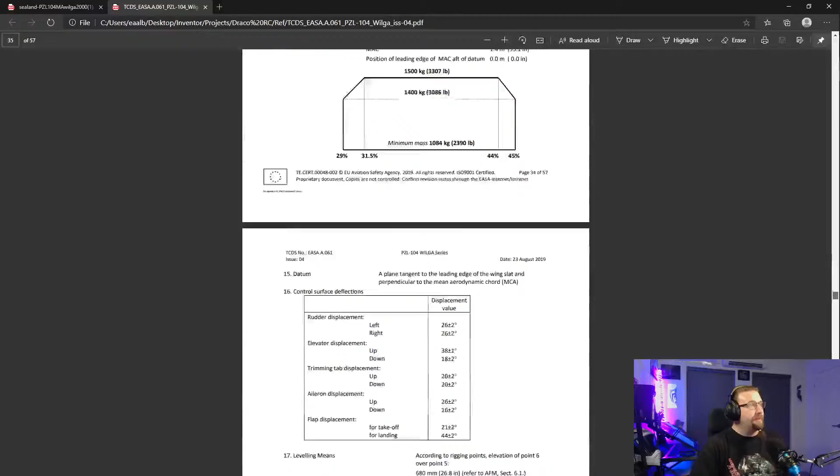Stuff like this - yeah, so I've got lots of awesome stuff. Got the EASA documentation, European Union Aviation Safety Agency. This goes through all the Wilgas, from the 104 Wilga 80, Wilga 32s, the 2000s, all the Wilgas, all the information. This is a big document. Lots of stuff. Most of it's going to be useless to me, but there's going to be interesting stuff in it.

For instance, let me just move to a random spot and pick something. Load factors, not so important, but we do have this information. So this is important information here - wingspan, 11.28 meters. So we can say 11 meters to be safe if we just chop off the tips, because I'm trying to measure from the center of the plane to the end of the chord.

This is important for when I'm doing the designs for it. I don't need the tips. I can design those after and then make sure that they're inside of a certain size.

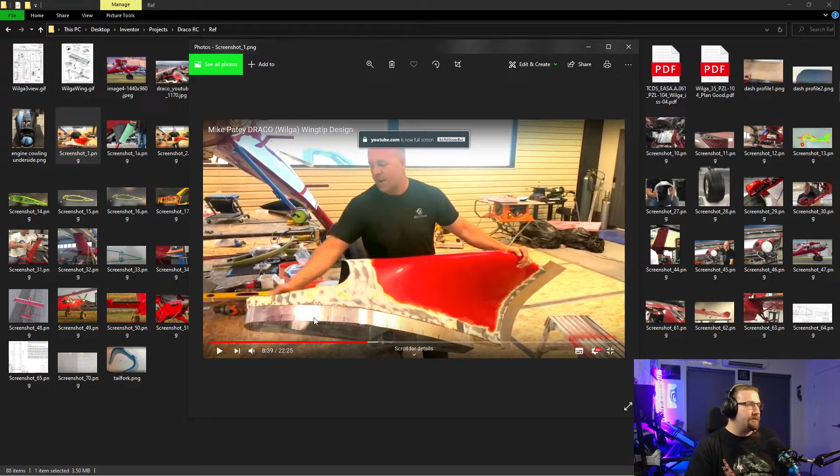But it doesn't matter anyways, because of course he decides no, I don't want wingtips that are that small. So he made his own really awesome ones. Where's the picture of it? So he made these - these are standard, but then he cut stuff out, added these spacers on it because he increased the front of the wing, and he's also increased the trailing edge.

So he's had to modify this, and then goes and builds an entire new light assembly on it, which was really cool. That's going to be fun to model. Modeling this shape is going to be loads of fun.

There you go, Ruby, nice of you to join me. How have you been? You doing all right since you got back out from the hospital? I saw that on your Twitter. What have you been up to?

What else we got? We got some really nice shots for when he made - he makes this wing tip, right, this modified wing tip, and then he's like, you know what, I don't have enough fuel in the plane because I want to make this trip. I want to go a little bit further, so I need more fuel. So he goes ahead and makes a new one that's the same thing, but it's a little bit longer, and there's a fuel tank, an extra fuel tank inside here, and it's just like, dude, that's awesome.

Am I going to make the engines? Do you mean the engine singular? There's one of them. Here's a picture of the plane. So I'm going to use an electric motor.

The plan so far - this may change, this is early days, we're still working out the design constraints. I've got this Turnigy motor, this is the Typhoon 500, this is a motor out of a model helicopter. So you put this on a gearing ratio. Now I want to make an adjustable pitch propeller.

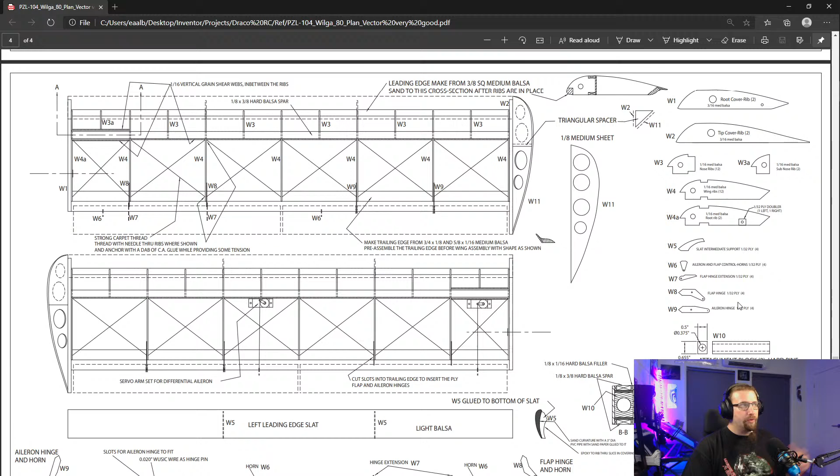This is the flap. What do they call that? Not strut, knuckle, hinge point. What do they call them? I forgot what they're called. Give me the name, please. Brain, come on, hello. There's a thing of them in here somewhere. Here, oh, they just call them hinge. Hinge extensions, control horns. That's it, control horns. So control horns are the ones you attach to the flap or the aileron, and the hinge is the one the aileron is attached to, and the control horn is what you put your lever angle on, your lever, so.

This was a really good set of designs, really good set of plans, and I can zoom right in on this to get nice, faithful... This is a vector drawing, so I can get really faithful images that I can take screenshots of.

Yeah, it's Hinge. I thought they had a proper name. There's a proper name for them. I forget.

So yeah, I will mostly be using this. It has wire landing gear. I don't know why the main gear is made out of a bent piece of music wire, yeah.

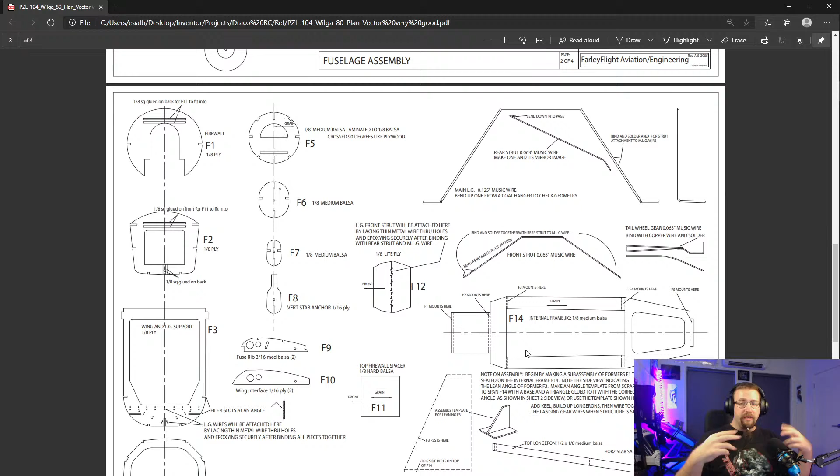0.063 wire, not useful. So the landing gear is going to be the biggest design challenge, because I'm going to have to reinforce them with carbon fiber rods. I'm going to have to design cavities inside the thing for the resin printing to slide those rods in there.

But then the actual suspension mechanism is going to be quite difficult, because he made quite a robust system, but when you get down to this small scale, it's going to be trickier and trickier to put the axles through. I'm going to have to get either carbon fiber axles or metal axles, or brass bushings or something to actually stiffen up some of those designs.

Where is it here? So this is the knuckle assembly for the suspension hinge, and he's got a big strut that he sticks in the back that comes off this piece that he stuck off the side here.

So I would have a carbon fiber rod, let's zoom in on this. I'd have a carbon fiber rod that would run through this up to the fuselage, and then I could probably get away with drilling a hole from the other side here and putting another rod through this way, or vice versa, drilling a hole and having that drill go through the first rod I put in, and then I can epoxy that all together.

And then this here, I don't know, like the connection between this big rod that goes to the fuselage and then this axle that has to go in here. Maybe this rod is going to go through a rod that I first put through here. So I put one rod in here first, let's make it bigger. Then we drill the hole through that one and a hole through here to line up with the hole that's already in there for that one. And then I put one from here in here and drill through it here, and then put one through here, so that'll create a nice stiff frame there. And then do the final drill for this one for the axle.

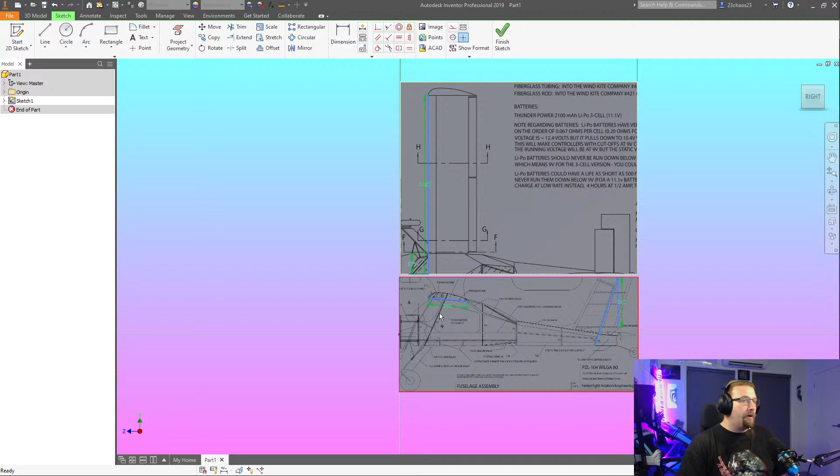So I've got this open. Now, I started with, based on how big my resin printer is going to be, that determines how big of an object I can print at one go. So if I want to make the wings in a reasonable amount of time with a reasonable size to get the structure for the carbon fiber spar, all the hinges for the flaps and ailerons, the leading slat on the front, then it needs to be a certain thickness, and that's going to determine the length of the chord.

So I'm going to go with 250 mil for the length of the chord. So from the front edge of the wing to the trailing edge of the wing with a flap, about 250 mil, maybe a bit more, because this is missing the actual flap here. So 250 plus. So where's my tape measure? If I get that out and measure out 250 mil, that's going to be a nice fat wing. Right, from here to here. That's a nice fat wing. So there's a lot that I can fit in that space.

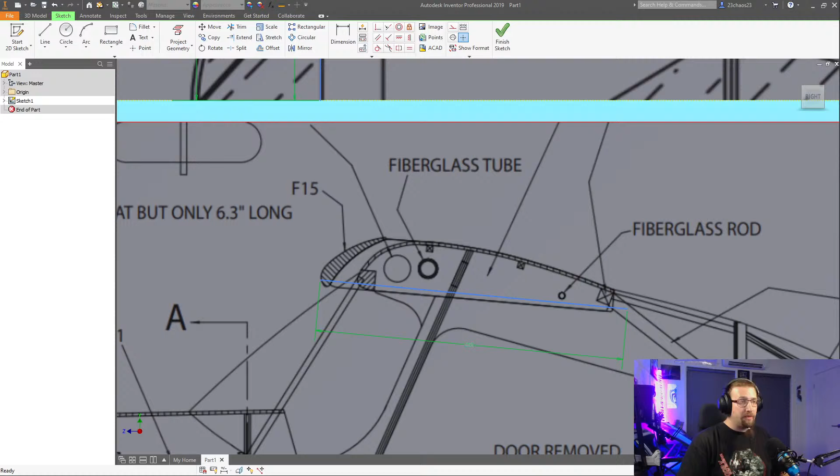Now that I've got that measurement, I then get the drawings, put them in Inventor on the image planes, and scale them to that measurement. And then I can start pulling off other measurements. So then I go pull off the wingspan from the center of the plane, and it's around 1,100 millimeters. So that's a 1.1 meter wingspan either side, which is decent. This is going to be a 2.2 meter plane.

Let's just show you how big 2.2 meters is. Right, this is a decent sized room. See that back corner over there? That's about 3 meters away. There's 1 meter, there's 2 meters, 2.2 meters. I'm touching the door handles on the other side of the room over there. So that's a decent size. That's a decent size wing. As she says, it's pretty big.

So that's gonna be lots of fun. And I can print that. So I can print the wings standing up inside the resin printer that way. We hope. That's gonna be fun.

So what else do we need to work out? Now I need to work out the small components, as I was saying, the landing gear and that. And I've got a book that I've been writing when I spent the whole day yesterday watching his videos for the build series for the Draco, and writing down every little bit of information I could. So I've got a whole page of writing all sorts of fun details, and the big tires that he stuck on this thing.

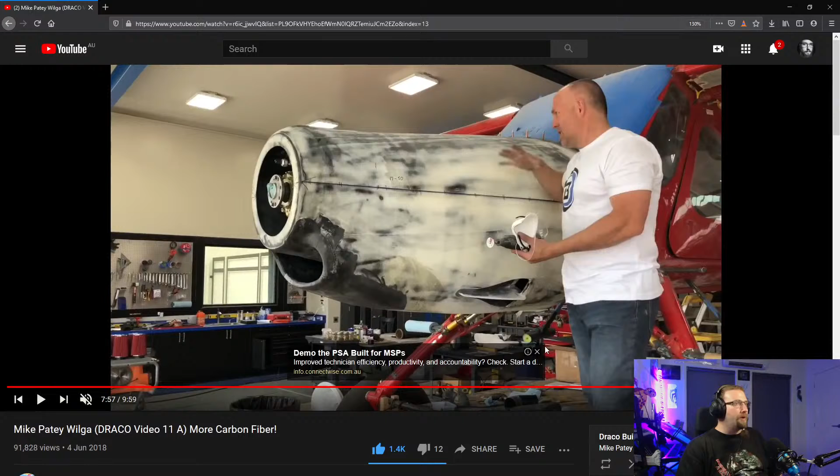And looking at photos and comparing the size of the tires, I mean, I've got images like... where is it? I'm sure I'm missing some photos here. I must have overwritten a bunch because I'm sure I've taken screenshots of this. So I don't know, I'm going to take a screenshot of it now. Save. 68, I don't know, save.

So I can compare now because I've got a rough estimate and I know what size those tires are, so I can work out the size of that engine.

Shots like this one, the camera is very far away, so it's a very long shot, which means there's very little perspective shift on the image. Everything in the foreground is very similar in size comparison to the background. There's very little perspective shrinkage, and I can come in and go, right, from here to here.

Screw it, where's my tape measure? If I know that the tires are 35 inches and I measure it on the screen at 105 millimeters, and then I measure up here to that, it's at about 165.

That's not right, there's a bit of an angular perspective shift. So let me measure from the middle of the tire up to the top of the tire, which is a vertical angle. There should be very little perspective shift on that. And we get 50, so double that, it's 100.

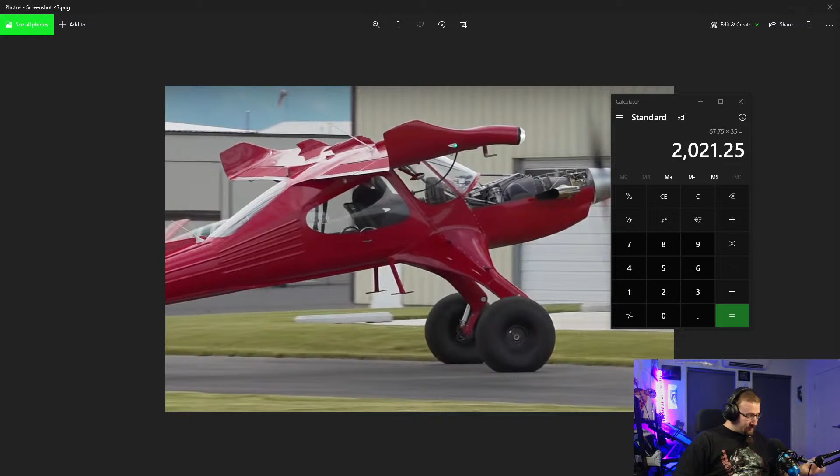And this has got a bit of a lean to it, like the plane is pointing away, so that measurement will be a little bit shorter because of the angle the camera is looking at it from. Woo, go me. So yes, I will run with the 81 inches, it's pretty damn close.

And we will carry on with that. So coming back to here, let us put in this doodad, which is going to be our firewall.

Now see, this is why I don't like these balsa plans, because they draw it funny compared to the real aircraft. If I go and get another image, let's grab that orthographic 3D scan that they created of the plane.

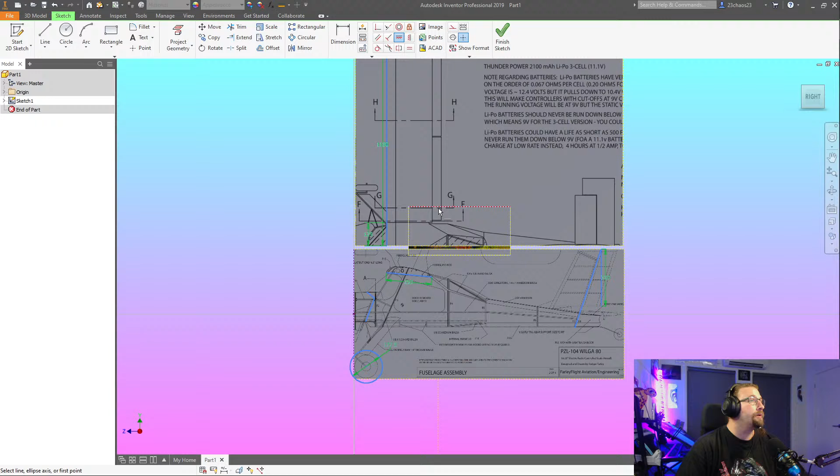Let's chuck a... nope, other one. I don't know why it flips around in some of the views, you put the vertical constraint for a horizontal constraint. Let's move you out of the way.

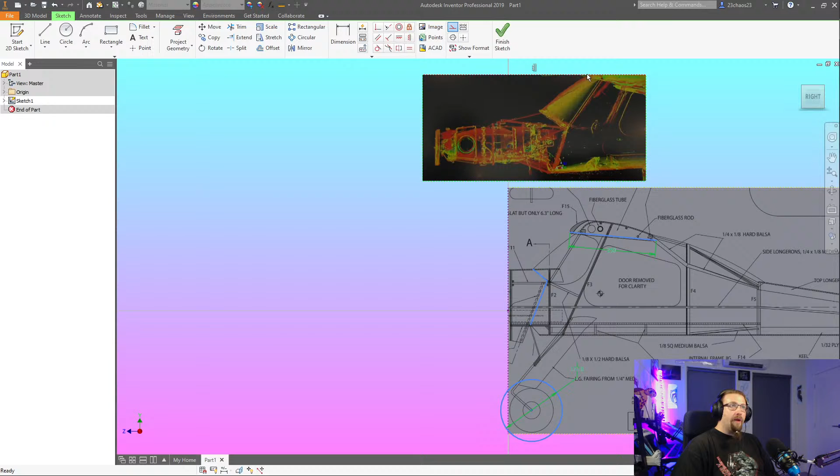So where is a line on here that we can absolutely guarantee we can use as a reference piece? I think it might be the tip of, windshield to the start of the door frame. So the door frame in this image is along this line here, because in here they've removed the door. This is why I don't want to use the balsa plans directly. You look at the radius of this door here versus the radius on this balsa plan, completely wrong. That's why I'm only using them for very basic measurements. But at the end of the day, I'm going to use these pictures I grabbed off YouTube from his videos, because they'll give me far better dimensions on certain angles and radiuses. Even the angle on that windshield is different.

No, it's about the same. It's pretty damn close.

So what other measurement can we use? From the gear here through to that point there under the wing. Let us draw that on here, point to there. Right, we will use that as sort of a reference point.

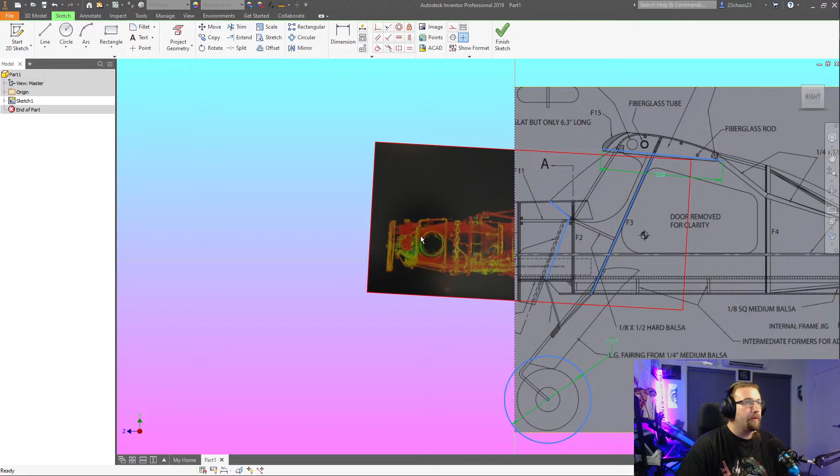Now also, when this photo was taken, the aircraft had a bit of a lean on it. You can see the underbody here has an angle, so I might grab that and delete this, just so I can scoot you to be horizontal like so. Maybe that was a bit too far. That looks better. So now I'm trying to line this up to the balsa plan, which is no good.

Yeah, it seems straight. So it looks like that angle on the balsa plan for the firewall is actually pretty close. Let me measure that angle that's in there and see if it's a round number, which is pretty close to. If it were 110...

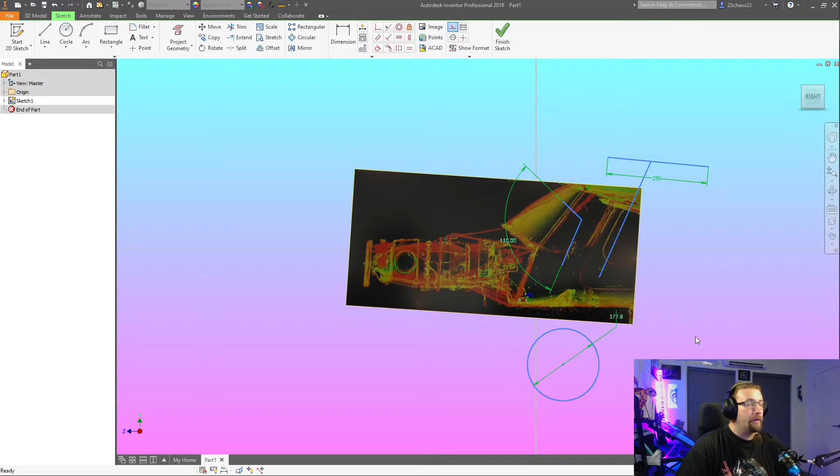Let's bugger this off. Let's build the aircraft off of this point. So that's going to be my central reference geometry right there. I really should do it off the CG, which will make life easier, but no, we're not doing that. So we'll stick you there, and then we'll grab this point...

And we'll stick you there. So 110 isn't quite right, so let's try 105. And 105 looks heaps better. Shift you out of the way. Let me nail you to the middle of the map, so I can work with stuff. Stick you back in there. So 105 is a lot closer. In fact, I'm going to call it at 105. That looks damn straight.

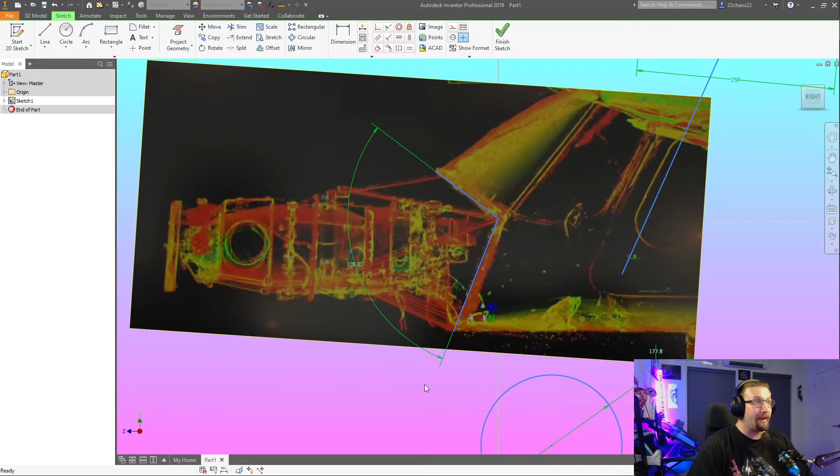Sweet, so we have that angle. That's good, fine, dandy, happy days. Oh, happy days.

Now what are the pictures that we have here that we can use to get some information off this plane? I still haven't got any word back. I've sent him a message on his Instagram account. I have sent him an email on the email that's provided on his YouTube channel. I'm not sure how else to get in touch with him. He does not have a Twitch account from the looks of it, or if he does, it's his personal, private, home life sort of thing.

This image. Now we must remember when we are pulling geometry off of this thing. So we've decided we're going to make this our common reference point for all geometry in the plane, or as much of it as we can. We must not pull reference off of this bottom edge of the cowling here, because the cowling sits about 5 inches lower than the keel of the plane.

Now I want to get this angle here in relation to this angle here. So this is a pretty damn good photo to do that with. Edit, edit, flip it, just save it.

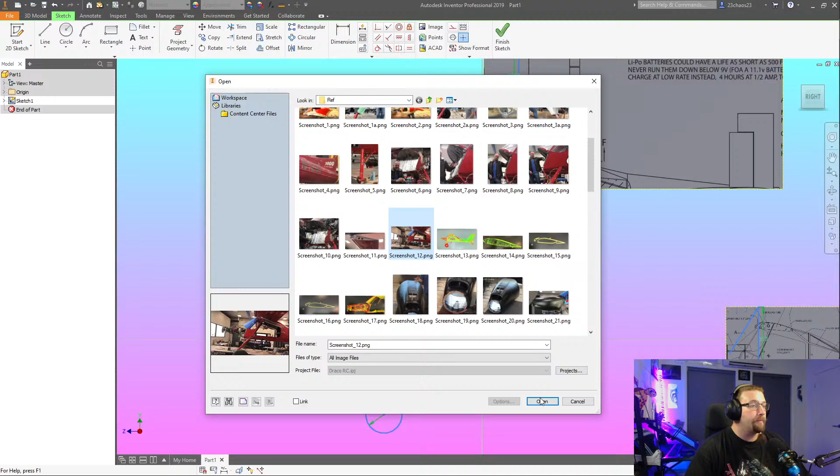Where is that image? This one. They always open up like that. I wonder why.

Now there is an option in Sketch to go into the image properties and set transparency, and just set it to like a gray, and that'll give it a half transparency. Or not.

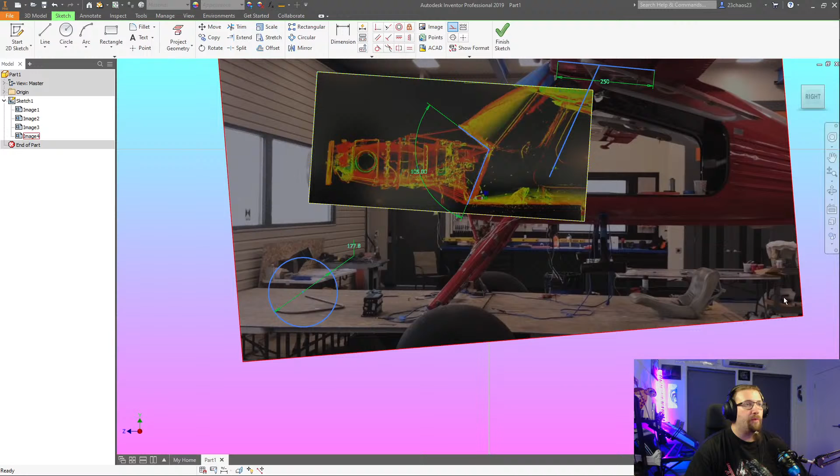Be a bit bigger. And a bit bigger still. Bit smaller. We'll go with that.

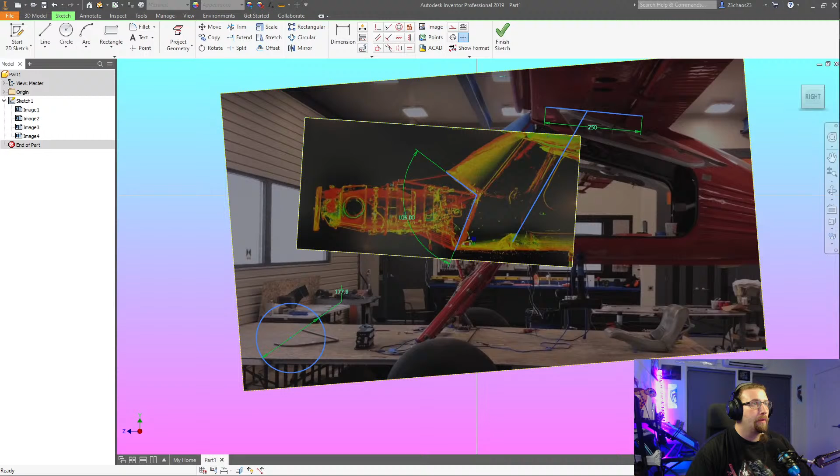We've got to line that up there. Put one on there. Keep it pretty parallel through the strut. Comes off right to the outside, so let's move it right to the outside there. Let's not include the cables that are there. And what else? I want to grab one off the other side for the other strut. So let's just set that like that.

Sweet, and then I'll come in and grab a dimension between these two. So we've got about 1.5 degrees difference, and then I can grab this one off of here, and would you look at that, it's 39.5. So if we split the difference and say it is a 40-degree angle, that looks pretty damn close.

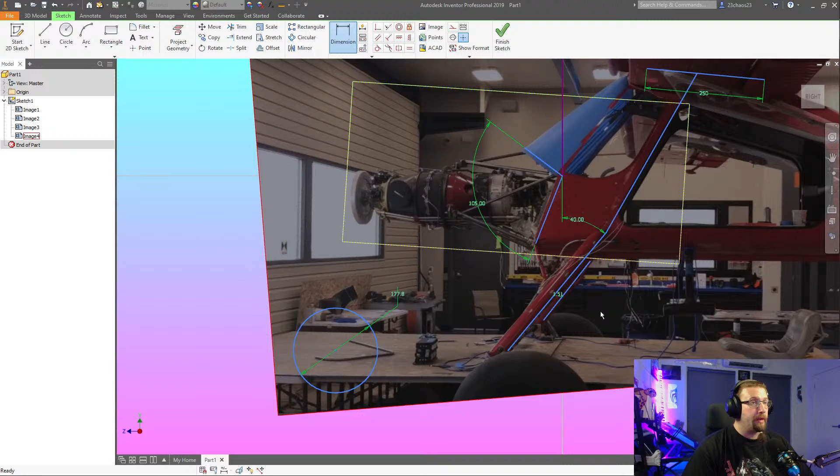So let's delete that. I'll grab my sketchbook and we'll start putting in some of these things. New page. And we'll just do a rough sketch of the aircraft quite easily by opening this up. Central line.

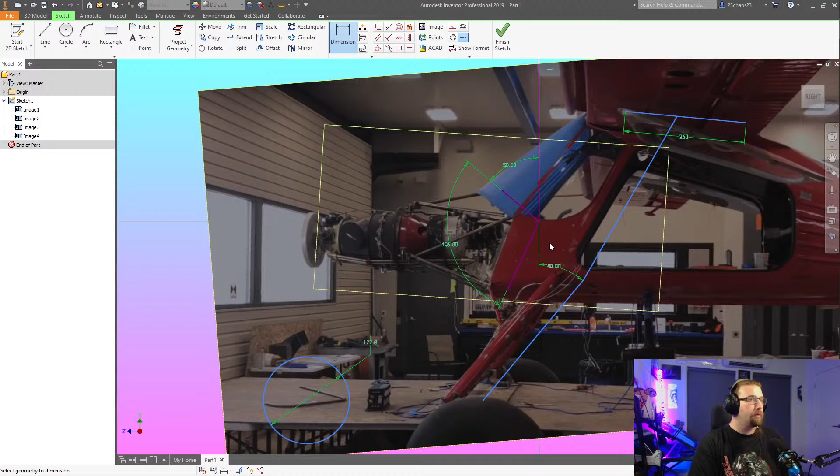Right, so we said that angle there is 105. The gear angle, 40 degrees off the vertical. I want the lower firewall angle. Yeah, no, we'll go with the upper. Go with 50, and then we adjust this.

Let's chuck you out of the way. Chuck off the line off the bottom here, make sure it is perfectly horizontal, so we can line the image up nicely. And yeah, 50's not quite enough. So let's not go off this one.

I bet you if we go off this one, it'll be nice and simple. Let's lower that to 20 degrees. Too much, 23 it is. Does that jive? I think that jives. That jives. Just about, we drag you down like that. And that jives. Okay, I like that. I like it a lot.

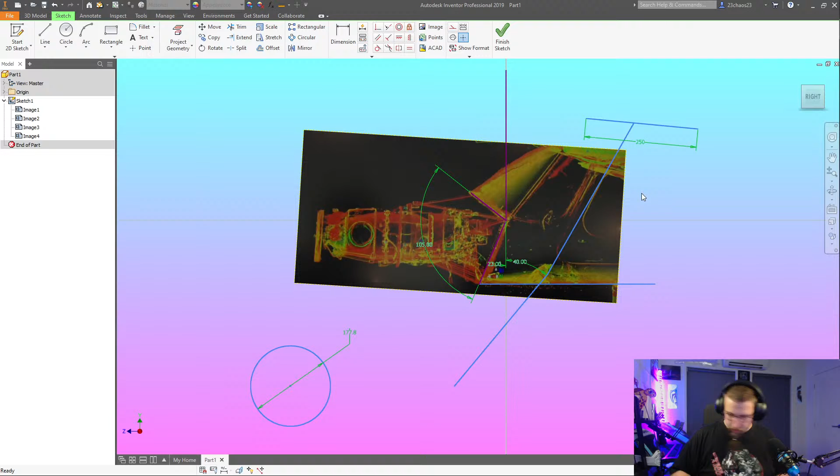Rulerini. Cool, and we've got blue for the Z-axis. Red for everything else. You better not be a glitter pen. You're a glitter pen. Oh, why do I have so many glitter pens? God damn.

Gear, firewall, a black one. Let's write this all down. 40 degrees for the gear angle. God damn, glitter in black? Why is there glitter in my black pen?

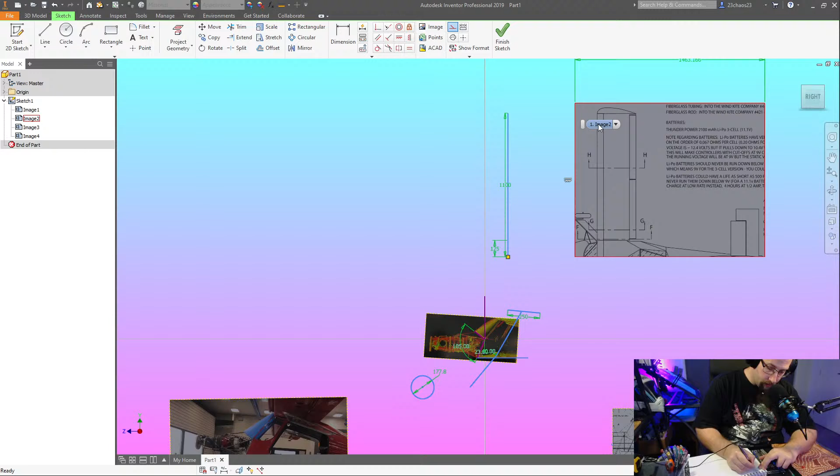Sweet, all right, angle of attack on the wings. This is going to be trickier. I can't use this image. I don't want to use this image. This is pointless for me. But we can write some other stuff down, so we are indeed going to go with a wingspan of 2.2 meters, or 2,200 millimeters.

This cut line, when it goes all the way to the back, it only goes to... so when he drew this cut line on here, he drew it from the center of the circle here. Let's make that a bit smaller.

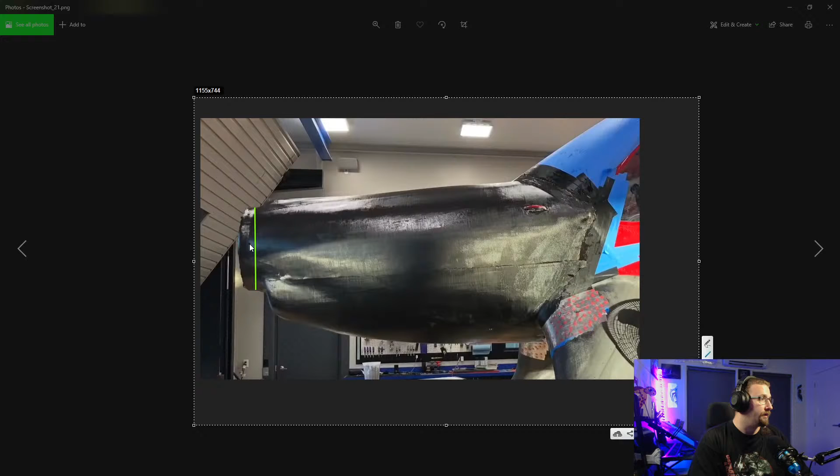So from the center of the circle there, he drew it perfectly in line with the draft of the plane, which doesn't come up to this point that we're using as our reference point. So I went up a bit on this side and like that, and I went down a bit on this side.

I had it cut out for the gear apparently. But the measurement I have is for this length of this line, so this cut line I measured it out for, what was it again? 81.25 inches.

So let's say that's another 4 inches, and round up to 85 inches for the length from the reference point to the front. We can all be in agreement on that. That sounds like a fair assessment to me.

It would be lovely if I could get in touch with Mike and say, hey Mike, how long was the new cowling front end from this point to the front face before the spinner? Give us a number. I'll take metric, I'll take your imperial numbers, I'll convert them for you. Don't worry about that, just give me the numbers, I want the hard data. I'm sure he's got a file on his computer with the exact wingspan, the exact weight, area, because he did all the calculations for everything, so he's got all those numbers. If only I could just go, hey Mike, hey buddy, please have dimensions, thank you.

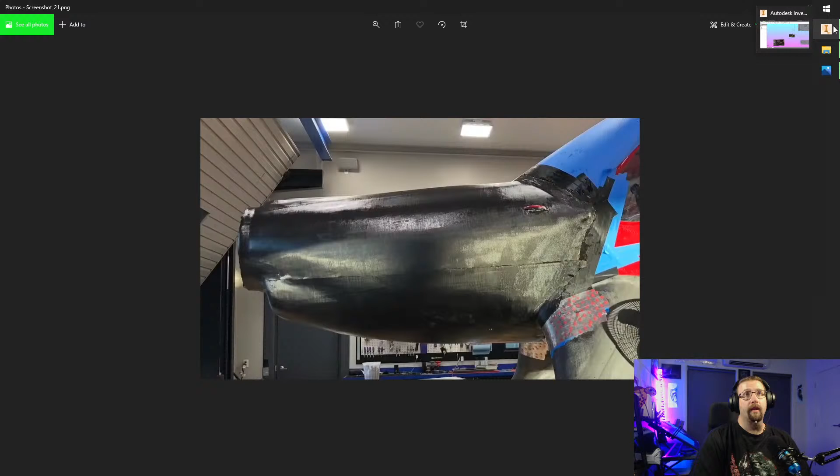Oh, I know this one, this one is easy, we already have this. Because it's right here, right? This one was 7 inches. Okay, never mind, never mind. Let's just draw a line from here to there, and we just type 7 inches.

Not 7, you doofus, where's the 1? You need a 1 in there. You are the 1. So that is 431 millimeters, which is pretty big.

That's almost not going to fit in the 3D printer. I'm going to have to print it on a diagonal, and they'll be printing the top and half bottoms separately.

So let us write that down. And if we drag this line now over to that point to there, to this here. Now this image, we haven't got to the correct scale, but it is pretty close based on some arbitrary MacGuffins. So I'm happy with going with 431. In fact, let's just make it a nice round 430, because hey, I like round numbers, they're easy to remember.

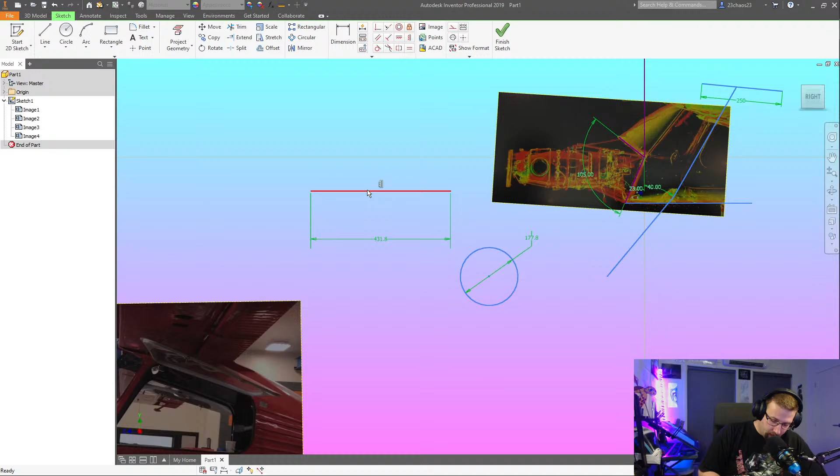430 millimeters, fantastic. And if I take my pencil, let's just draw a better looking representation of the wing, like such.

What color? We just had orange. Running out of colors, there's only so many primary colors. It's got glitter in it. Purple, let's go purple, there's no glitter in that. Come on, start, these haven't been used in a while. I don't think these are brand new, I haven't touched these, I haven't used these. So I need to get them all started first, a bit of a squiggle to get them going.

Nice purple wing. Good at that undersweep. Lovely. And let's use this purplish color to draw the line across for the length of the chord.

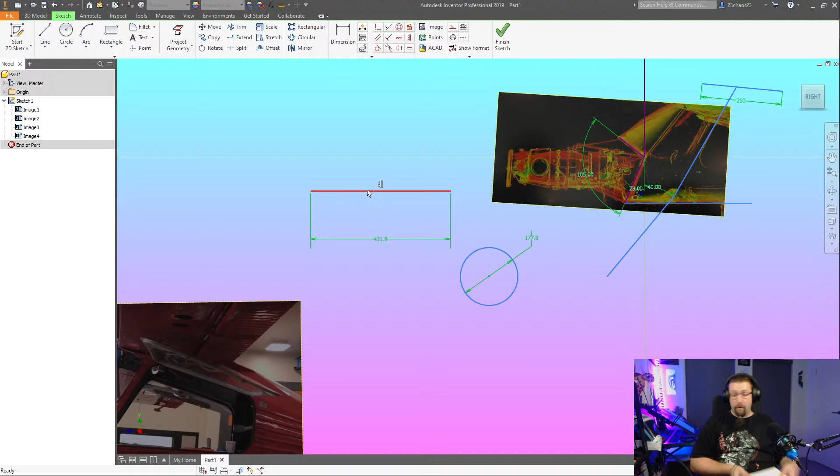And we don't have to convert that because all prop sizes are in inches. But if you want me to convert it, a 20-inch prop is... there's no inches on here, so I'm going to have to convert it. A 20-inch prop is 508 millimeters. Woo!

So, my pen, the prop, DIA for diameter is 20 inch, or 508. Now, because I am going to make

a variable pitch prop, like an actually mechanically working variable pitch prop, so I can have a fixed RPM motor, because it is a fixed RPM. This motor is out of a helicopter, RC electric helicopters, and they like to run at a fixed RPM. They have very high torque and whatnot, and they're very good. And I'll make a planetary gearbox and everything for it, and the mechanism for the pitch thing.

I know how it works, I'll show you guys how it works. It's really easy, super easy, totally easy. 3D printing will make that not a problem.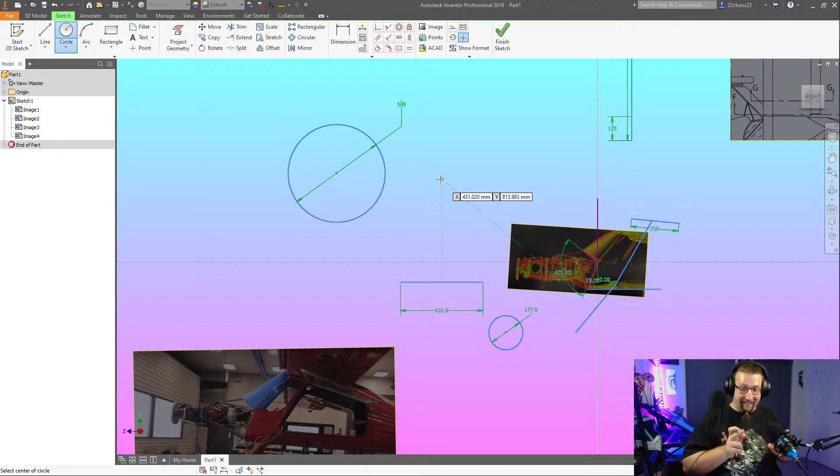But the beautiful thing about resin printing is that you resin print your blade with a cavity for the hole for the rod. You dip the rod in the same resin that you printed the blade from, slide it down there, put it in your curing chamber with the rod in it, and then recure it with the rod in there, and it becomes a part of the thing. It's amazing. I'm so excited to get this resin printer. So excited.

So that means we're going to have... let's work out what the spinner diameter is, because this is going to be important. This is going to determine what size limitations I have on the mechanical structure that actually does the pitching of the blades and rotates the blade to pitch. So let's work this one out.

We can go based on... not that photo. We have another photo that will work well for it. I took a whole bunch of screenshots and I'm dragging them into this folder the whole time, and I must have taken a bunch of screenshots. Oh no, this is it here. I was going to use this one. This is a nice clear shot of the props and the wheels.

Let's load in another image, and we're going to find it. Where are you? There you are. Drag it around like that.

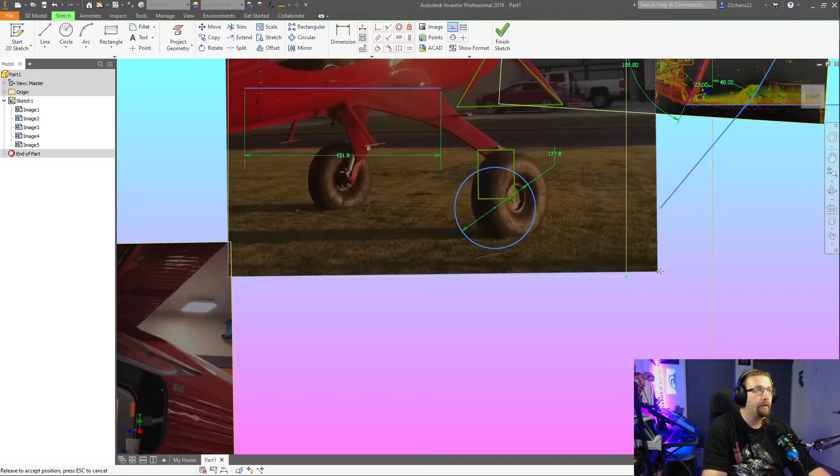So over here where we have the circle for the tire, if I just drag you until that middle and the top are touching. Middle and the top. Close enough. Yeah.

Let's drag you over here, grab the circle and drag you back over to there. So a little bit over. That's okay, then I can come in and go...

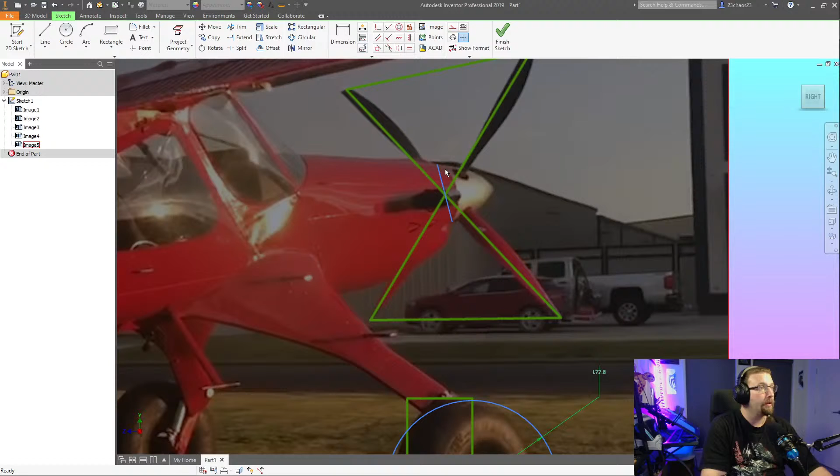Now I've drawn these lines on the props because it lets me see where the center point is, so I can cut through the center point to the other side, and get pretty close to what we've got.

And if we pull a measurement off that, 60 mil. Now that's not bad. That's more than enough space to do something really interesting. Is that all? Oh shit.

Okay, so the mechanism that holds the props, the blades and everything together and rotates them can be quite compact. I can do that inside 60 mil, or a little bit bigger just as the cowling starts to widen out. So it is a push-pull mechanism that rotates these non-concentric...

Hinges, like on here. So you've got the blade on its own axis. Let's go full face cam. You've got the blade on full axis like this. And there's an off-center thing that pushes and pulls it to rotate the blade angle of attack. So that can be made quite compact, and it's a symmetrical design, so it's self-reinforcing with the other blades, and there's 4 of them.

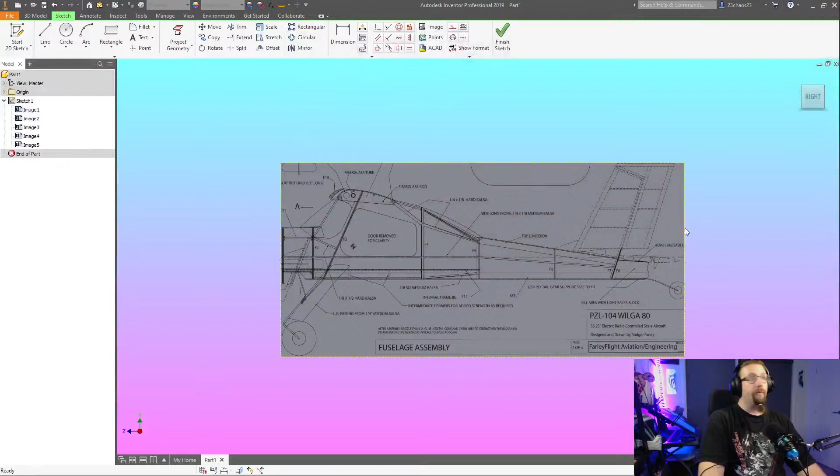So let's come in here in this like collage of dimensionality. There we go, there's the catchphrase for the stream. Collage of dimensionality. Dimensional collage. It's got nothing to do with space or time.

Well, it's got everything to do with space. Or more specifically, the size of space, because you can't just say space, you need to say how big is space. And now also, because you're dealing with gravity, I'm rambling. If you're dealing with gravity, gravity affects the density of space. So high gravitational zones, or areas with high mass or high velocity, compress or decompress spatial dimensionality, which is how LIGO works, which is awesome. You just point a laser down a track in two different directions, the same laser, and depending on how the laser wibbles and wobbles on its phases, it lets you tell if there's been a bit of spatial compression in one direction or not.

So this is going to be tricky. I need to lay you over like so. And then make you the same. Same. Close enough.

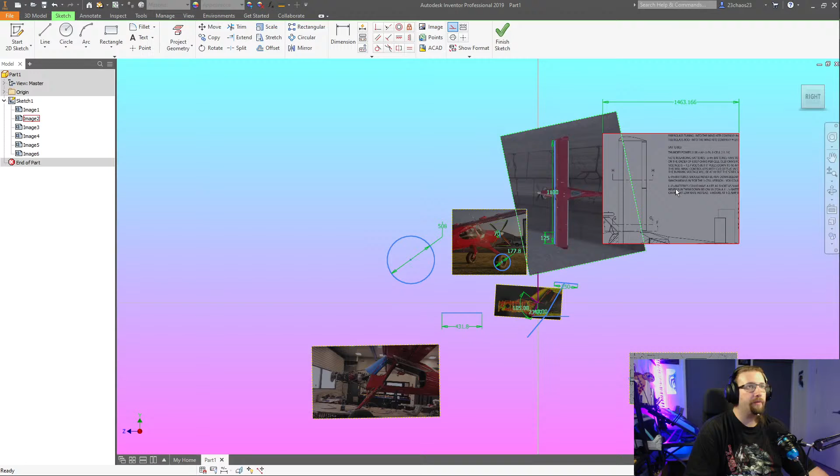Pretty dang close. And then like if we delete that one and we grab this wing chord. Ooh, okay. Oh wait, no, I'm doing this all ass backwards.

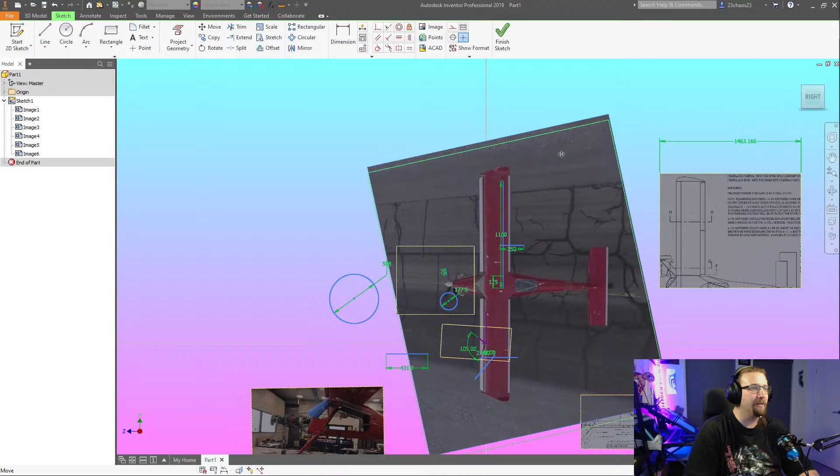Like so. To the middle of the plane, to the end of the plane. Let's do it off this back edge there. We got a nice clean line, and you got that camera mount that he put on the back top of the plane. You put a reversing camera on the fucking plane. How cool is that? There we go, sweet.

And so now we can get a rough measurement of the back end. Like from here to here. And the number is 790. Ooh, that's interesting. It's very interesting. And we can drag this.

Drag this, and we can put this. So now I pulled this measurement off the default wing, so like the original wing. So this is 250 wingspan OG, so this is the original span. So the wing chord. Where'd that pink fucking pen go? Yeah, that's OG.

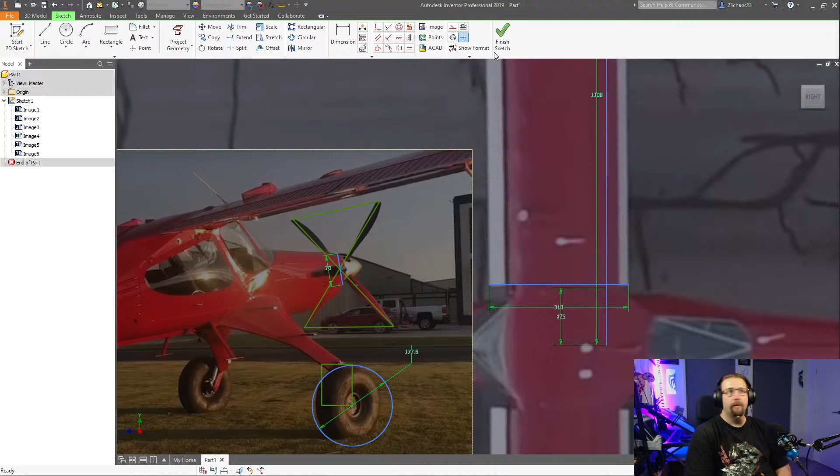Phenom. So this is the printer I want to get, and we have a print volume of 276 by 155.

Now, I don't know about you, but if I draw a box and we come in on that, so what is it, 276 by 155, so if we just go 270 by 150, and we measure from one corner to the other corner, we only have 308. God damn. So we have to make it smaller.

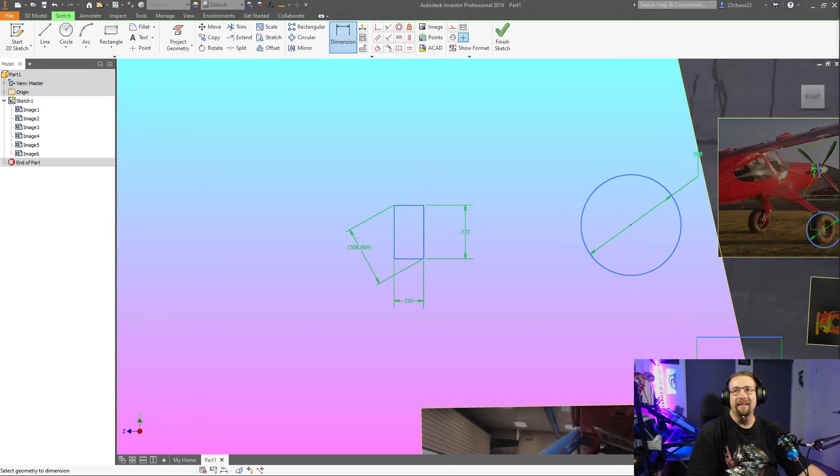But wait, it's not the end of the world, because I'm measuring that with the leading edge slat. And this thing has flaps and ailerons the whole length, which means I only have to print the internal chord of the wing, and I can print the leading edge slat separately, and the aileron separately. You're safe, it'll fit, fucking barely.

Oh my god, so all this business with the wing, I need to just scratch that out. That's bad, that's bad data, it's bad information. We need to get better.

Better, better, better, better. So now that I have that measurement, wing chord total... where's my pen? .310 - this is one fat wing. I mean, 310 millimeters. There's a lot I can do with that kind of area.

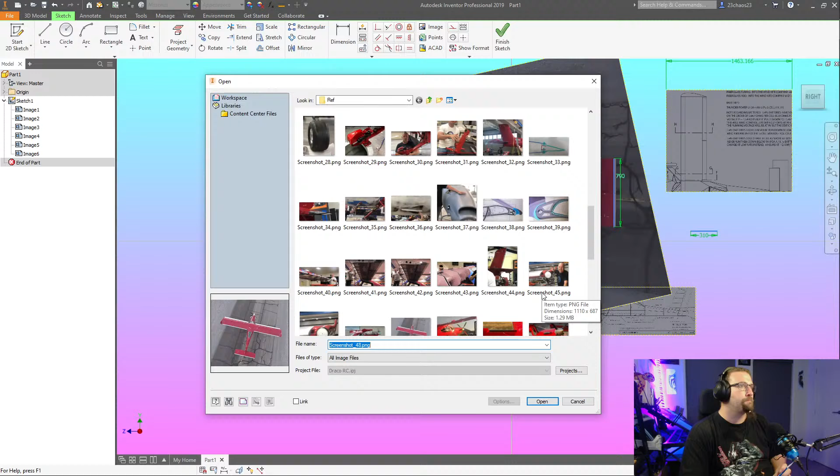Right, so let us grab an image of the wing that he made. So I have this image, and I have... probably go with this one because that one's at the very end of the wing. So between these two, I should be able to work something out. And I'll draw a sketch of it in my book too, so I can notate the measurements I end up choosing.

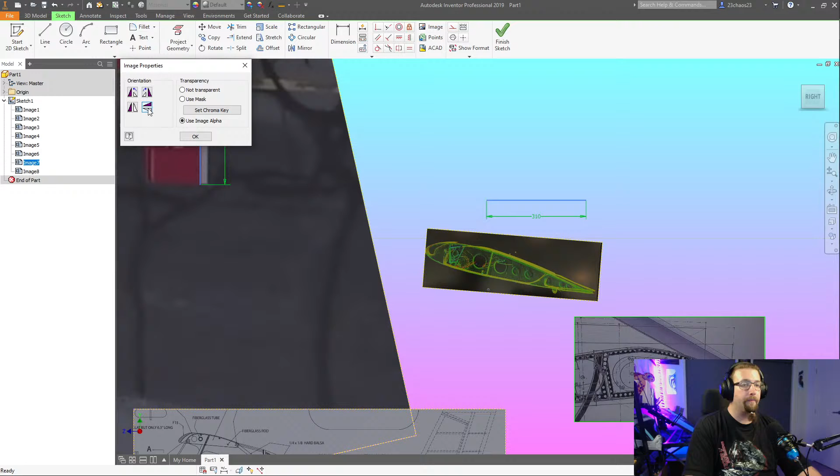So this one I can flip it around - nope. Properties. Flip it, flip it, flip it. There we go. And this needs to get smaller. Probably be heaps easier to do all of this sort of stuff in Photoshop, like lining up the images and things, but I can't be bothered opening up Photoshop.

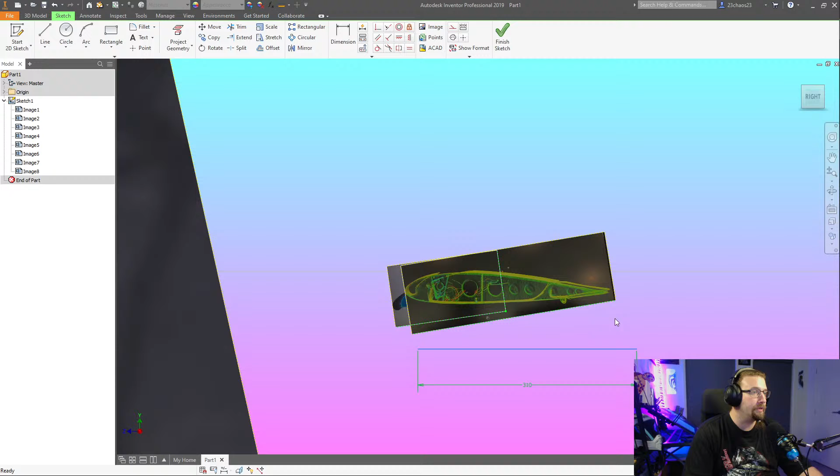I'd say that's pretty damn close. Pretty damn close. And that just so happened to be lined up almost perfectly as well. So these two do need to be just a little bit smaller. Spot on. Yeah, okay, so that's lined up. So from there and a little bit past the back, because he did add a bit to the end on the back, so that lines up nicely.

So we got the hooked teardrop for the slat, and then almost a perfect circle for that leading edge. And it's 2 curves in that part, and it comes out like that a bit, and then straightens out. Grab my ruler. Cool. And if I just make that a bit like this rather, so I'm not drawing off the end of the page.

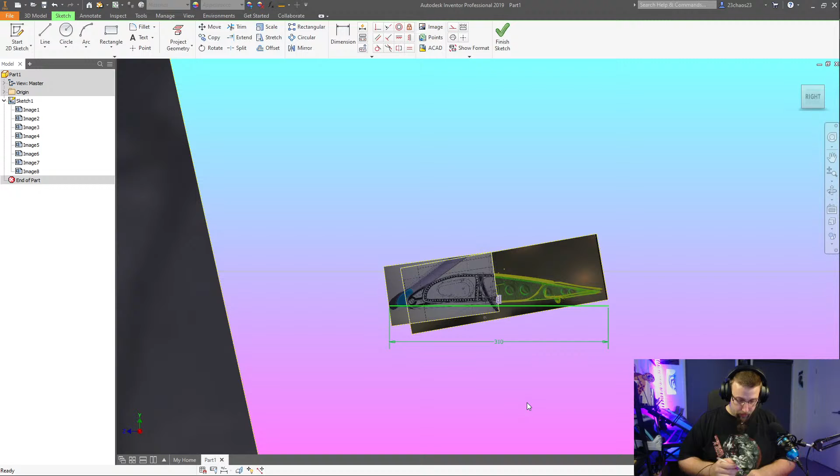.310, which means I can now pull measurements off of this, because we've got here - this would be the end of the wing, so aileron. So the chord for the aileron comes off the back there like that, just for reference. And then the chord for the aileron we will make 90.

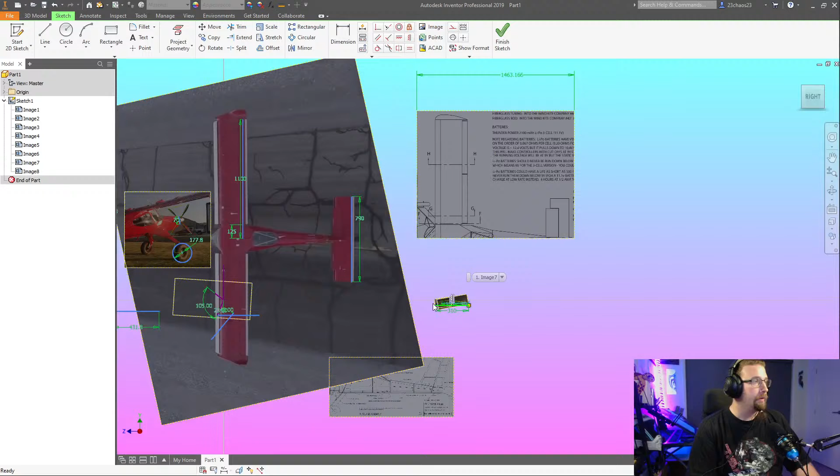See here, let's do the tail section like so. The elevator is 790 across. And the total, if I just draw a box, would be better - just draw a straight line. From here to maximum leading edge is 200.

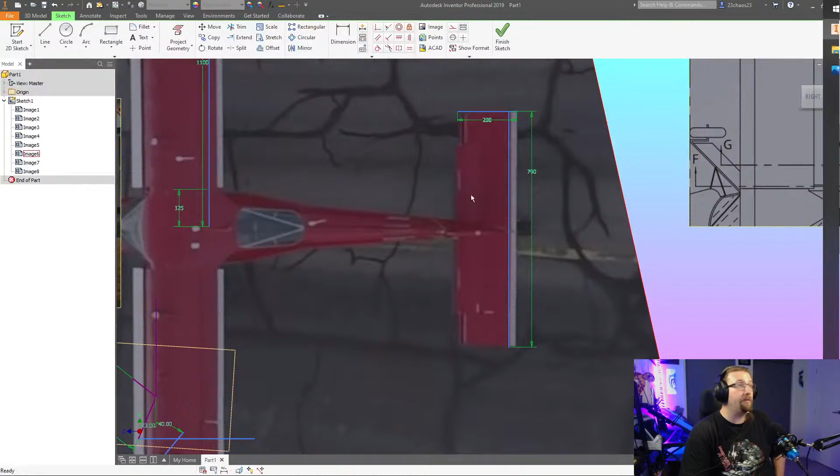I've got my bed - what was it? 270 by 150, by 400. I might have to print each wing section in 3 parts, which is alright - it lets me put spars in nicely instead of trying to push a wing spar all the way through a whole length of a wing. I can join them, and it's resin, so I just take a bit of the resin I just printed with, paint it on the edge, stick them together, stick them under the UV lamp, and poof - now it's one wing.

Lovely. We can just about see this line here. Can't quite see where this edge is, but we can see the length of this inner part of the elevator, the stationary elevator surface.

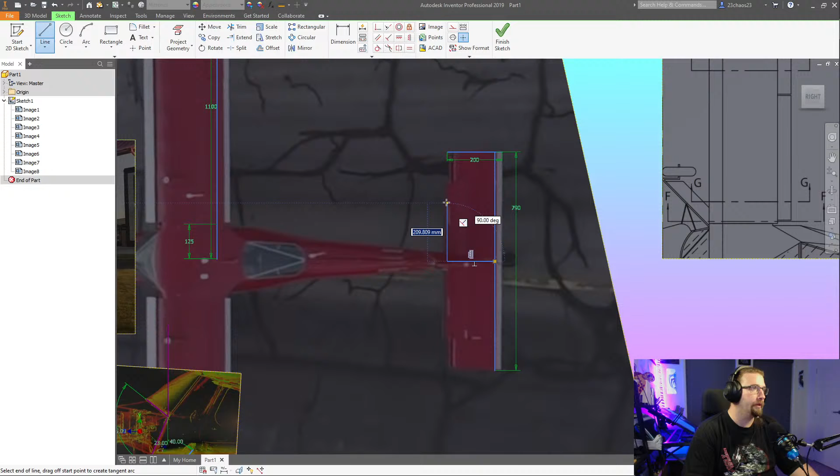So if we go from the center point out to there, and then up to say, if we go, say 290, and then in by...

Should we say half and half? Let's have a look, see what photos we've got. Make more of an estimated, educated guess here. It's not quite half and half. The flat area is actually larger, even without the extension that he put on it.

What other images did I grab? I know I've got some good ones somewhere. Aside from this one, this one looks at the underside. I don't think I have a really good photo of that elevator.

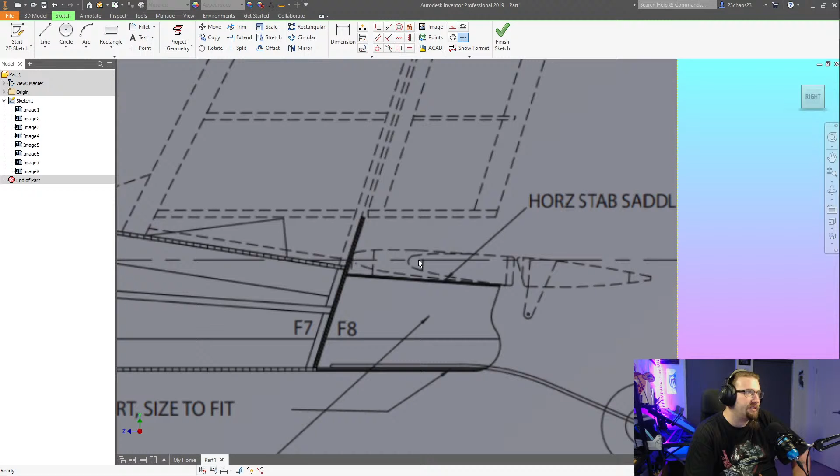And it's got a fucking delta to it. Like it's swept. It's not, it's a straight line. I'm looking at a bird's eye view of the plane here and it's a straight line. There's no sweep angle on it. This is why I don't trust the balsa plans. Do not trust them.

Does this edge line up with that edge? Is this actually sticking out further? Shouldn't be. Do I have no other images of this damn plane? So yeah, that doesn't line up. I think there's a step there. There is a step.

So it is total at 200, and then that step would be like... I wouldn't go as far as 180. 185? Yeah, 185.

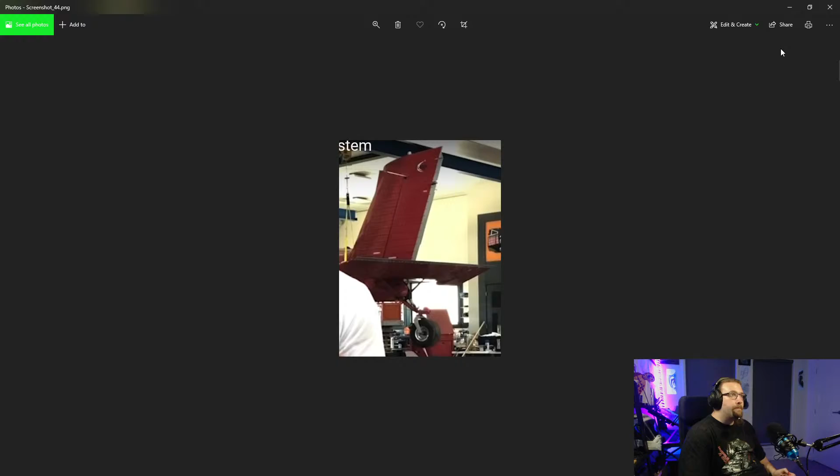So if we go from there, pivot point here.

I just don't trust the balsa plans. When the guy that made them made the balsa plans, he probably had access to the actual plane and pulled measurements off it with a tape measure, which would be the ideal situation. But then he's adjusted it for scale flying, so adjusted flat areas and stuff like that. You never know what they did when they made it, whether it's perfectly to scale or adjusted for scale flying where you need slightly different surface areas. So there's no way to know, and that's why I've come in here and I'm working this out for myself.

Yeah, I think this is the best image I've got to try and work it out with. And from here to here, let's use my hand. Let's do an Adam Savage. There, to there, and then it's off by that distance. It's 1, 2, almost a third.

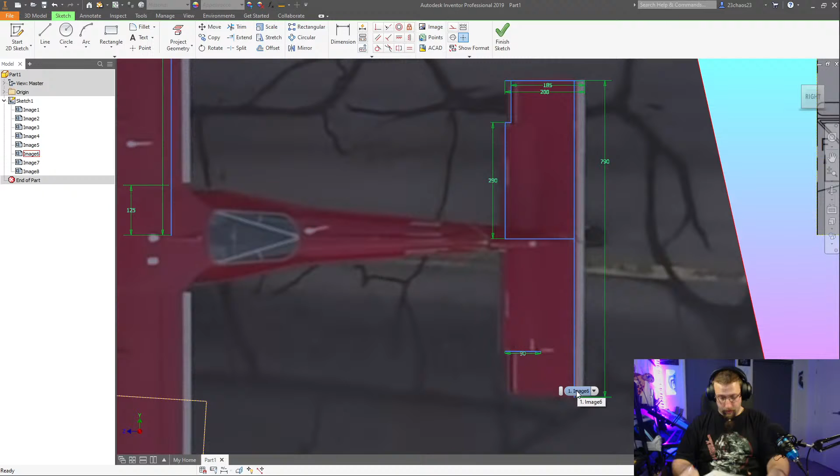So, grab my pencil and let's just draw a cross-section sketch of the center of this. Not to scale, obviously. And we'll do one this orange color and the other in the red color.

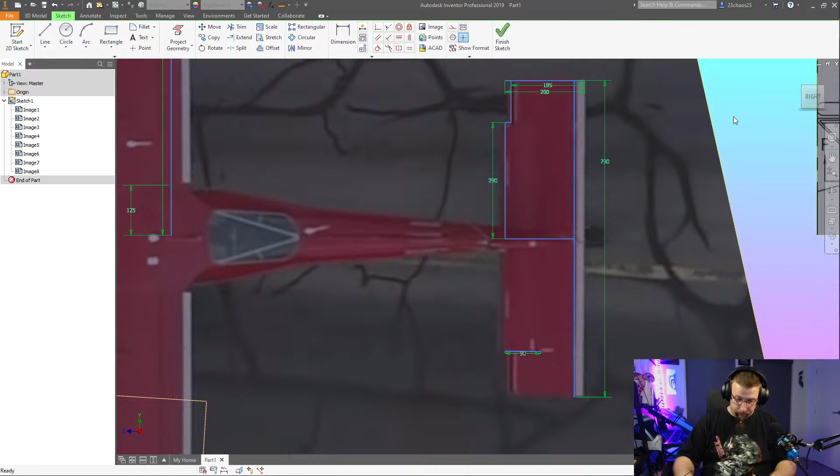Right. Elevator. Chord. Ta-da!

Let me show you what I've been working on so far. It's a mess! Wow, it's so hard to see for you guys, there you go, a little bit closer. Getting all the measurements, angles, and stuff in, working stuff out bit by bit. But I think we are getting close, very very close to putting away the pens and pencils and paper and just get some geometry made.

Put this one away. Run out of places to put my pens. Fantastic, pack away the toys. Whoa, sorry about that, rip headphone users. That's done, I'm going to put this up here.

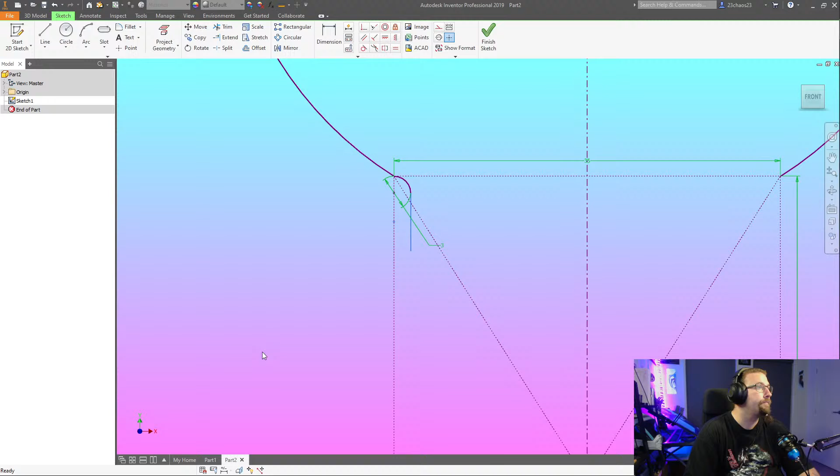You and you, make yourself useful. Now this lip that we have on here, I want it to measure from here to here. 4 mils should do it. That point is left over. Then we can offset.

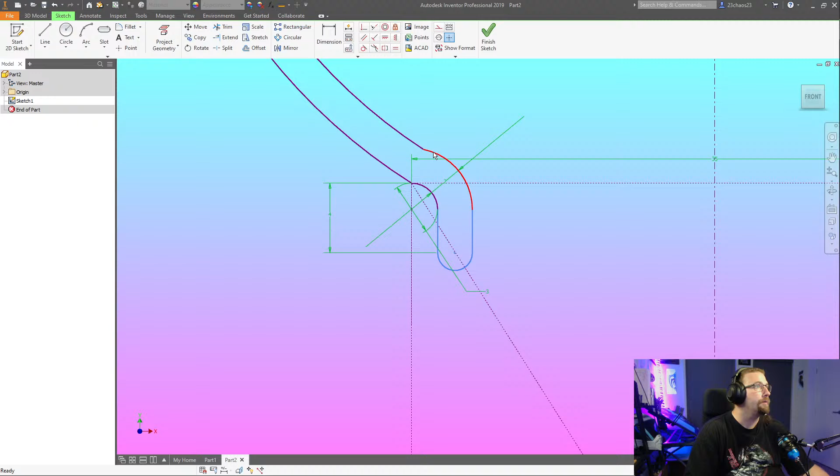Ta-da! Tires. Just like that. Now, where's that picture? Let's close these. There's a nice close-up shot of one of the tires.

I doubt there's going to be much detail on this one. Nope, because it's all moving. It's all blurry, blurry, blurry. There's some writing. I'm gonna... Oh, what do they call them? Alaskan tires? Yeah, Alaskan somethings.

Yeah. There we go. One tire. Save.

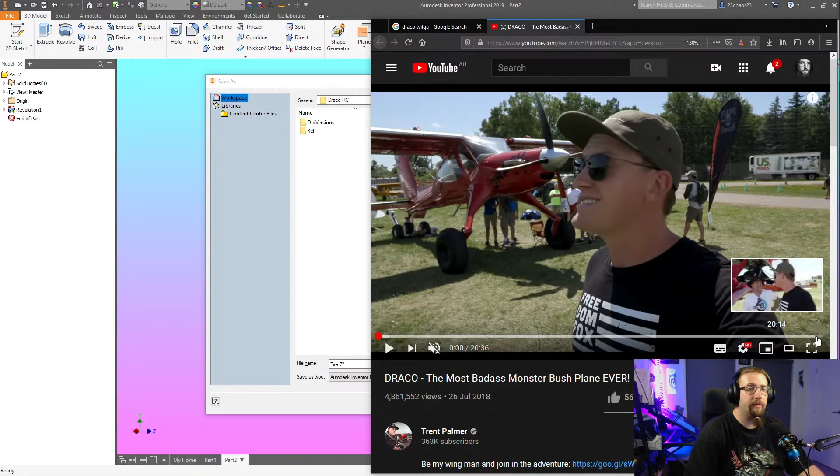Do they get close-up shots of the tires? Nope, they got plenty of shots of Mike though, which is awesome. Let me just like tire. Ooh, that might be a good shot. No, it's only 600 by 600. I'm not going to get any further information off that.

I really need to see if I can get a hold of Mike and just ask him some questions. It's going to be the best way, is to try and just get a hold of Mike and see if I can steal some of his time.

See, making this is going to be fun. That's a nice high-res photo. What on earth is this? Abomination. Oh my god. Pilots, crazy people. I'm a pilot. I have flown an aircraft, an actual full-size aircraft, once for like 30 minutes.

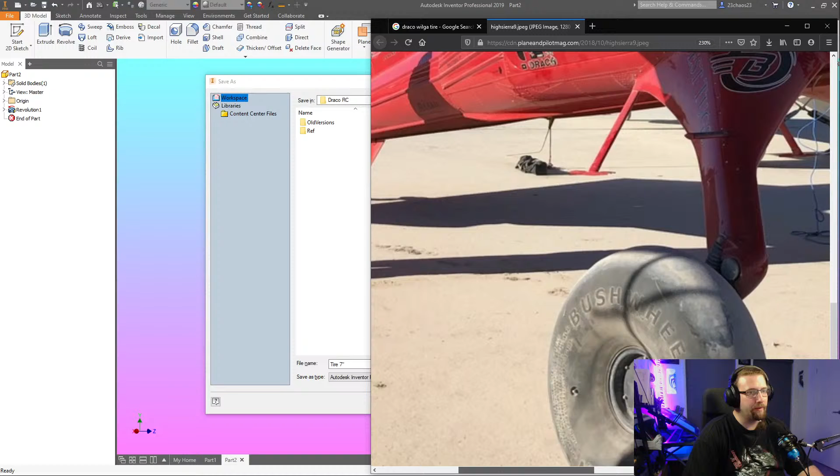So where's this picture that I clicked on? Where is it? Bad Google. View image. Bushwell. Bushwheel? Bushwheel. They're just called bush wheels.

Righto. Yeah, close them. Cool. Tire. 7-inch bush wheel. Save.

The file name is not valid because you don't like those things. Let's rename it the bush wheel tire.

Sweet. And then come into plane, offset from origin YZ. Bring it out. We want the right side to the front, so back this side. Front. Doesn't have to be too far away, just like that. Sweet.

Start sketch, new sketch. Sweet. Hide the sketch plane. Bye bye. Text, geometry text.

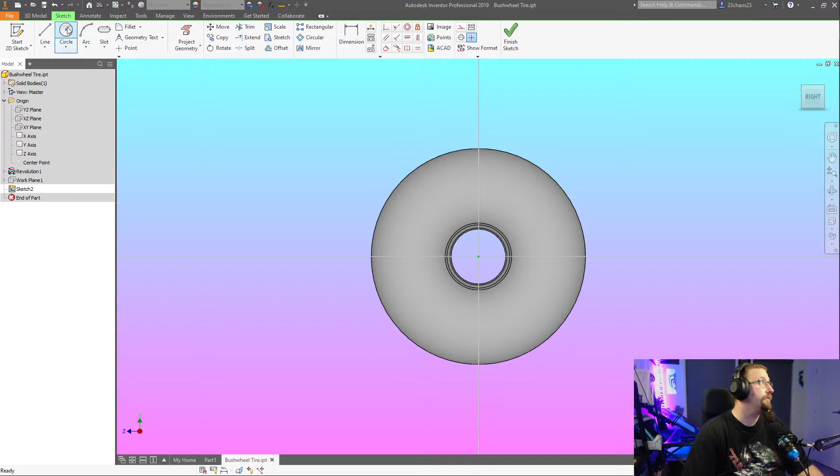First, I need a circle. Just any random circle. Geometry text on the circle. Bush wheel. Can't see it. Too many E's. Bush wheel. Let's go white, so I can see what I'm doing.

Let's just put a space between each one. 2 space, 3 space there. Space, space, space, space. And yes, everything looks good. Size.

8mm? No, a bit bigger. 14. There we go.

And then we can adjust its position from the center, changing the diameter of this. 50mm from the center, so it's about right on the edge of the wheel. Click OK. We don't want to extrude, we want to emboss.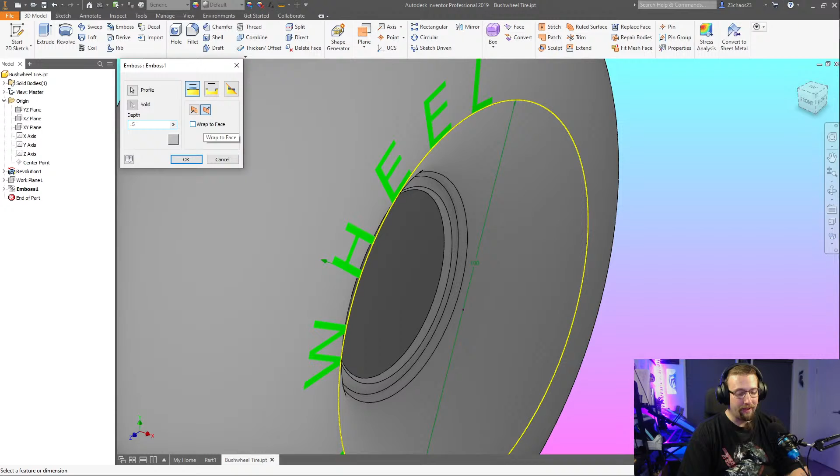Yeah, we got 0.5. You gonna go ping again? No? Cool. Bush wheel. Cool. And do I want it on the other side? Nah, we have a wheel. Woo! Right.

Should we make something else? Should we make the back tire? Let's make the back tire.

Tail wheel. In the history of the Draco, he had 2 wheels, well technically 3. He had the original wheel, which was no good, it was bullshit, I think both me and Mike can agree on that. Then he went to the big one, an 18-inch wheel for landing in sand and soft ground when he was out in the backcountry. Later on he switched to a 12-inch wheel and made a new attachment. So now I have to decide, do I want to go with the big 18-inch wheel or the 12-inch wheel? These are the questions, these are the big questions of life.

I do wonder, how long have we been streaming for? 2 hours, 18 minutes. That's not bad.

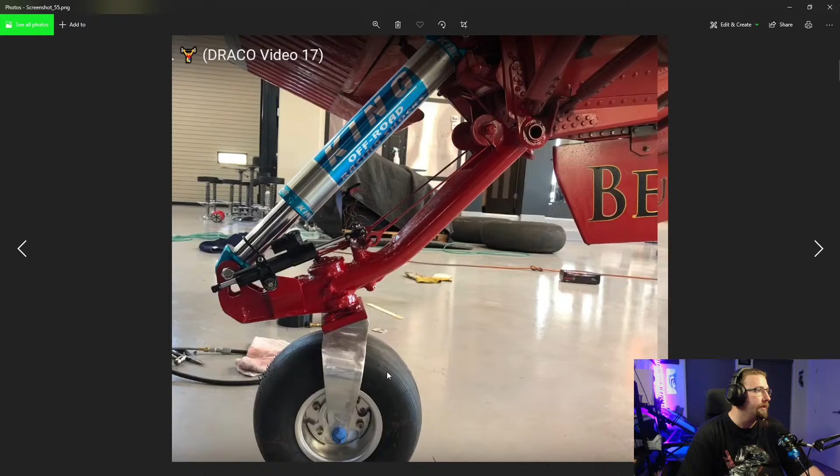Now if we go and look at the pictures, let's see if I can spot the difference. This is the 18-inch wheel. If I take its radius and lay it over on the side, it's about as wide as half as it is tall. So it's a half rectangle, which means if you take a cross section of its radius and width, it makes a square. Which makes life easy, we just go with that.

And then if we look at the side profile, there's no sidewall, there's just this radius, and then it steps out a bit. I don't think, yeah, we might as well put that in. This looks like a drag tire of some sort, is this off like a drag vehicle or a big go-kart? Pretty flat, a little bit of a radius to it. We'll put the radius in there because it tracks better in grass. Let's go, so it's a square, nice and easy.

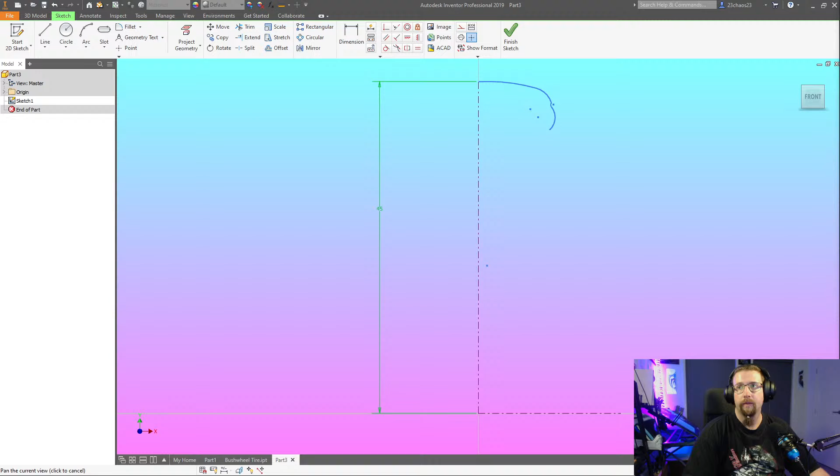Sweet, now we know that it's 45 and we want our maximum doohickey, which will be this one. No, let's actually do it off of this central point to that curve, 45. And we can say we need a perpendicular constraint from this curve to that edge. Holy moly moly moly.

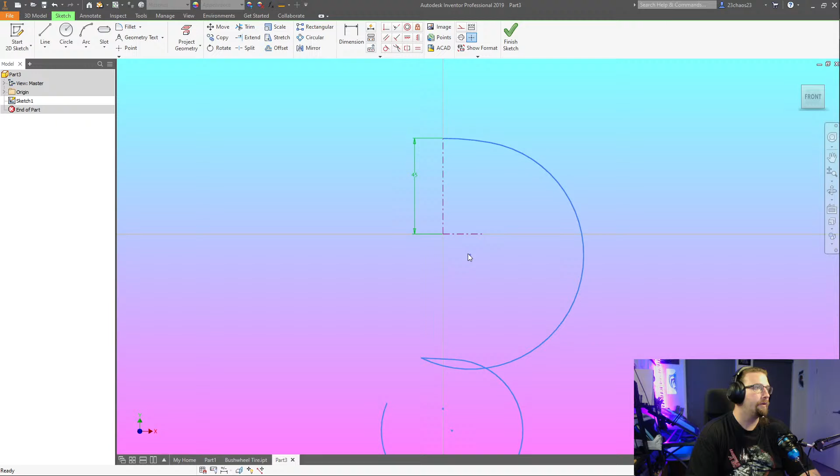And of course, thanks Inventor. Because reasons, I don't know. Screw you, let's see if I can fix it. No, I'm not gonna bother. Sticky there, so you behave. Then I'll select you, delete that, delete this one. Right, let's try that again, I'm not going to bother with that weird curvy curve thing.

So we'll bring one that comes down like so, we'll put our tangent in here. Already there, we'll bring you up, grab another one. Now select you, stick you on there. Sweet. Sketch constraint from here to there. Make it so.

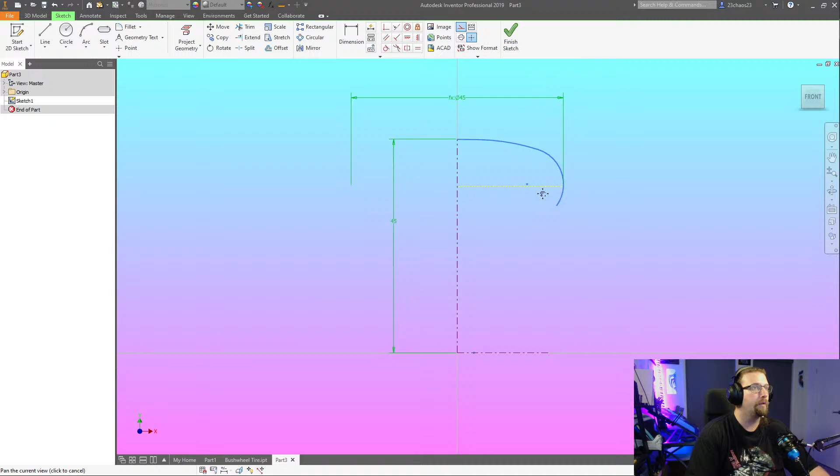Lovely. And where's that picture? Go with this one.

This is the shorter one. This is not the 18, this is the 12. And I can tell because he's got this new King off-road shock in it. This was the mod he did after he made this new bracket for the new wheel. Pretty sure, could be wrong, but pretty sure.

Where was that picture? This one. Looking at the size of his forearm there and the size of this tire, a man's forearm is generally 12 inches. If they've got a size 6 shoe, they've got a 12-inch forearm. So I would safely bet that's the 12-inch tire on there and not the 18, because the 18 would be much bigger than this.

See, there's the old shock that he had on there. So that was for the 18-inch shock. You can see the difference.

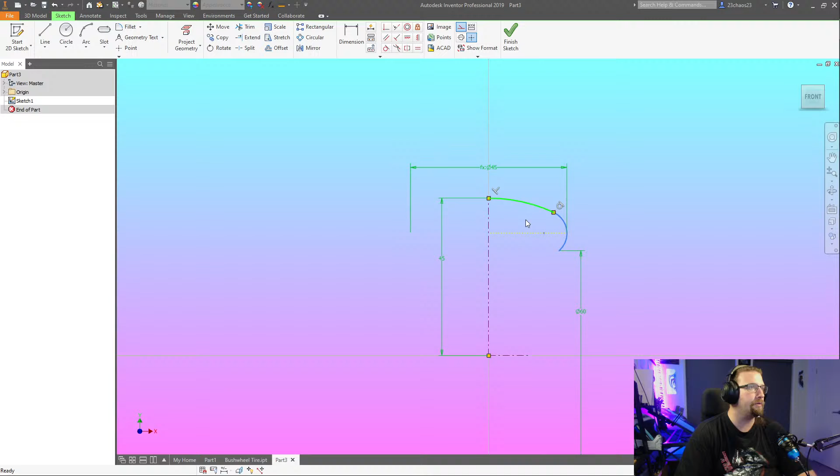Where did your... what? Where is your central point? How did you end up there? Let's see if I can grab it. Point, point 2. Curve, curve, point 2. No, I don't want point 1. I want... alright, screw it. Die.

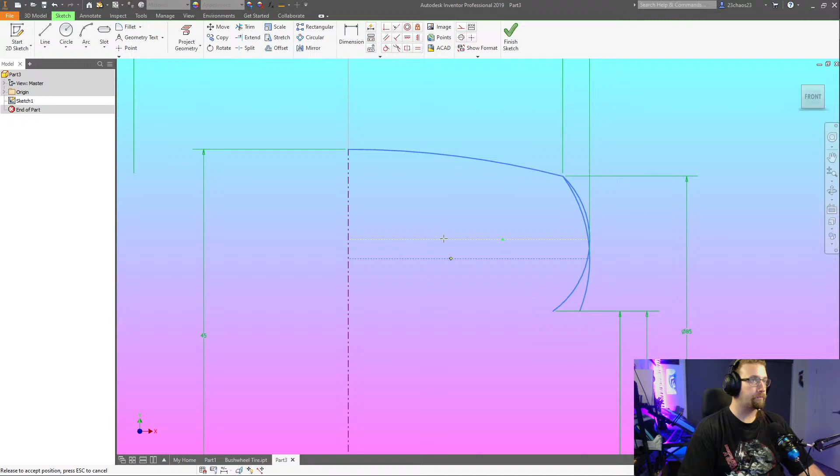Sweet, now we can run the tangent off of this to that, if it'll let me. You know what, we'll just leave it like that. Right, so this tire, sorry, the rim.

How big do we want to make the rim? So 60 sounds good, by... let's go 40. That's gonna look weird. That is gonna look weird. Is it? Is it though? I think it might just look right. Might just look right.

Let's actually crank this down to 55, give the tire a bit more chunkiness to it. Yeah.

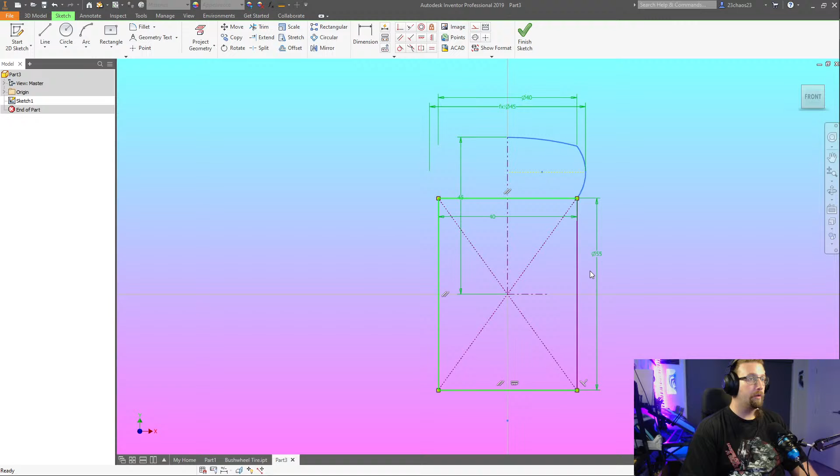So now the music plays uninterrupted. Jesus, what a pain in the butt. Where's my slot tool? Edge slot. 3. Get a haircut, trim, trim, trimity, trim, trim, chiroo.

Grab the point, make it go away. Apparently I can't delete that point. Okay. A circle from here to here. Three. Lovely.

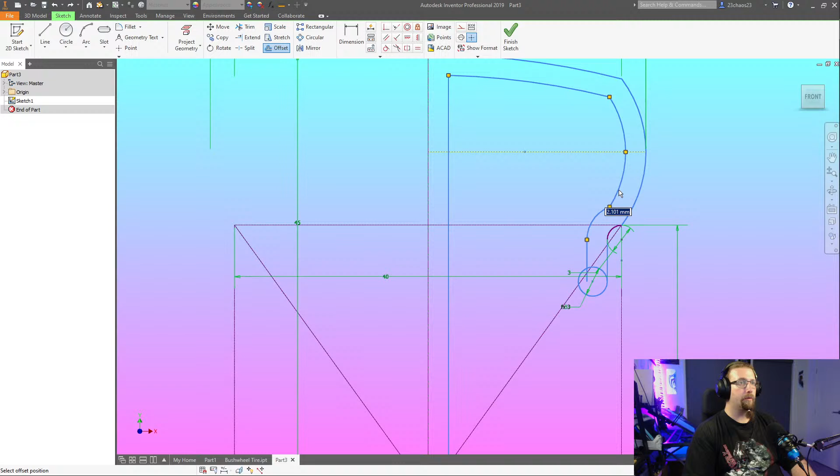This, offset. Three. What the hell, they don't do 3? They don't want to do 3. Weird, so weird. Offset.

3. See how it does it and then it dies. Offset. Let's do 2. No, it doesn't want to do 2 either. That is so weird. You know what it is? It's this circle, let me delete that circle.

One without dimension, let's just drag one out and stick it. No, it doesn't want to do it. What the hell is going on? Alright, this tire, it doesn't get to be hollow, it's just gonna be solid, for the strangest reasons I cannot fathom.

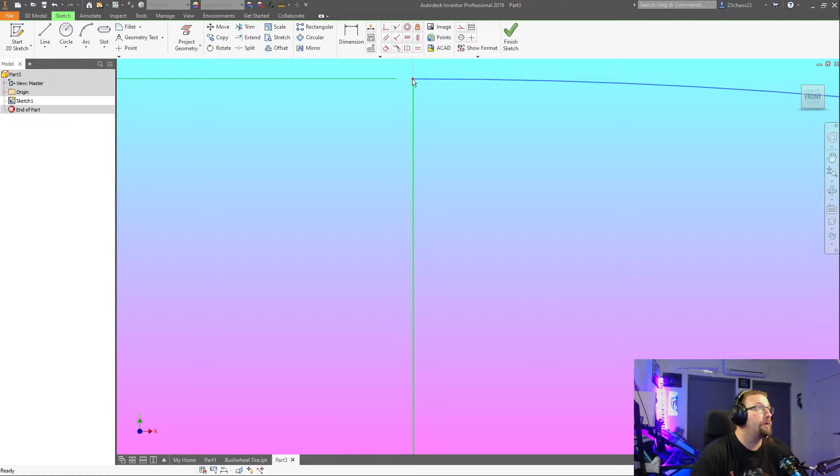There's sketch. Actually, we didn't need to make that line. There we go. Mirror line.

What are we going to call this tire? It's a good question. Can't read anything on the back of it, so we just call it the rear tire. Let's call it the rear tire. Whoa, caps lock's on again. Rear tire.

Awesome, we have 2 tires. That is a successful day's work. We made 2 tires.